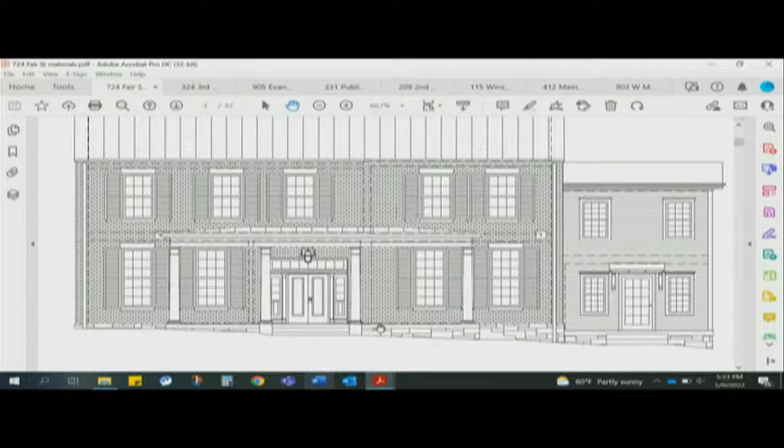As for the roofing, it was my understanding, and the applicant just corrected me, that they are asking to use wood shingle on this portion of the building. The guidelines state that roof materials contribute to building style and character, and recommend that one retain their historic roof materials and shape. If partial or wholesale replacement is needed, that should be done in a composition that matches the historic materials.

Since there are no historic photographs that show wood shingle that I have found, I did research the fire insurance maps to gather any relevant information on the historic roofing material. The 1913 Sanborn maps seem to indicate that slate or tin was in place on the main portion of the building.

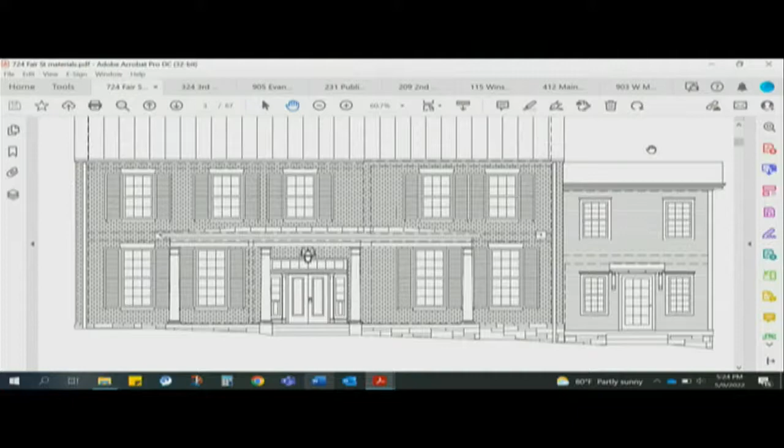I did that research thinking the applicant wanted to replace roofing on the entirety of the building, so that was my mistake. Though it does appear that the Sanborn maps from the 40s and 50s show there was a composition roof at some portions, including this one. Now, when they say composition, that could be a number of things—it's shake or shingle. It did not indicate whether or not it was asphalt or another material.

The use of asphalt was pretty common from the 19-teens forward, so it's not clear to staff if this was wood shake or not at this portion of the building. It is of a colonial revival style influence, and in our community, at least at this point in time, most of those roofs are of asphalt shingle composition.

So with that, it is recommended that the commission provide three motions. One, a recommendation request to provide a favorable recommendation for the Board of Zoning Appeals. For the roofing alteration, it be denied unless there's more information provided to indicate that would have been a wood shake roof at the time of construction. And for the alterations to the entrance, it be recommended that the commission approve with conditions.

The applicant is proposing construction of an accessory structure at the rear of the property. The guidelines recommend accessory structures be built in traditional locations, such as behind the principal structure, designed to be visually subordinate in scale, size, mass, and intricacy, shorter in height, and consistent with the elements and context of the principal structure they serve. The details should be complementary but not visually compete with the character of the principal structure.

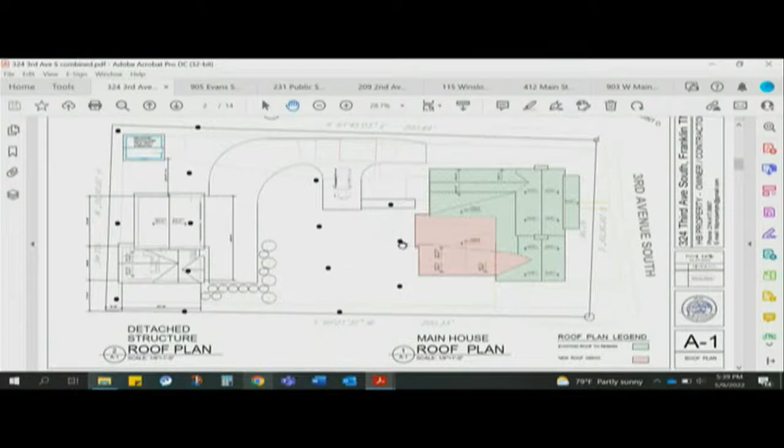In this case, going back to the site plan, the accessory structure is proposed at the rear of the property, about 6 feet off the property line, consistent with the guidelines. It's situated so the entire structure is behind the principal building. The design is compatible in detailing and scale to the principal structure, meeting the guidelines. The scale is one story, which is appropriate, matching the one-story principal building, and the materials will match it - the applicant proposes wood siding and similar roofing material.

The siding used on the accessory structure will need to match the reveal on the principal building. As for size, it is visually subordinate. The accessory structure is 18 feet at the peak of its ridge, and the principal is 18 feet 6 inches. It's harder to be significantly shorter when you have an accessory structure or a principal structure that's only one story, so they did work to get it just a little bit shorter.

The approved square footage of the principal building is right over 3,500 square feet. The footprint of the proposed accessory structure is 1,300 square feet, so it is downsized from what you saw previously, and it is in compliance with the zoning ordinance, which does not permit an accessory structure to be more than 50% of the footprint of the principal building.

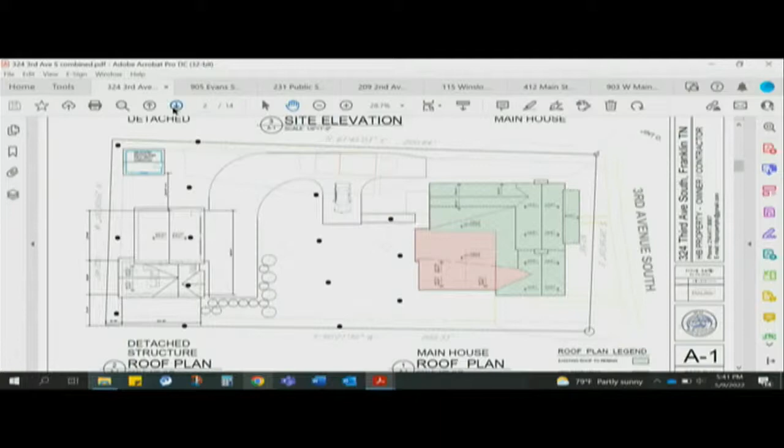The DRC at the last meeting had made comments about the massing of the garage portion in relation to the living quarters that are designed to be a part of the building, so the applicant has altered this. I'm going to go to the 2D elevations. You can see here the garage portion is a little taller than the living quarters, which are designed to feel as if they were an addition to the garage.

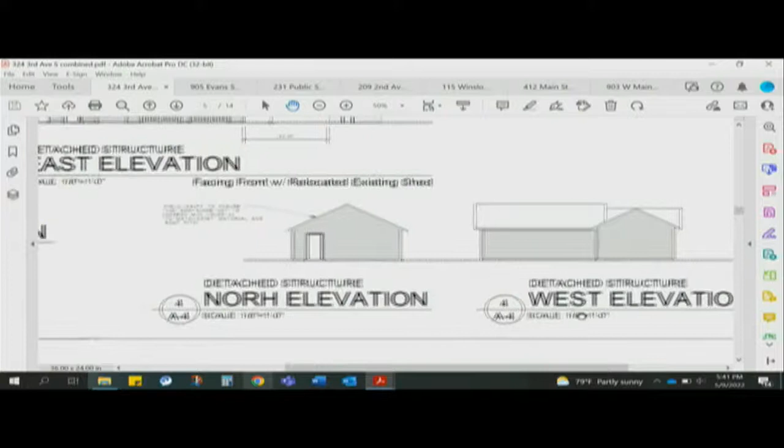This is the elevation that would face the back of the house. This is the elevation that would face toward the railroad. This is the elevation that faces toward the right and the rear, which has no fenestration. That's not typical, but because this is a rear elevation that backs toward a neighboring property, there was a request by the neighbor that no windows be placed on the portion that faces toward their property. So this is consistent with the guidelines, and that massing has been broken, so you can see that roofline break here.

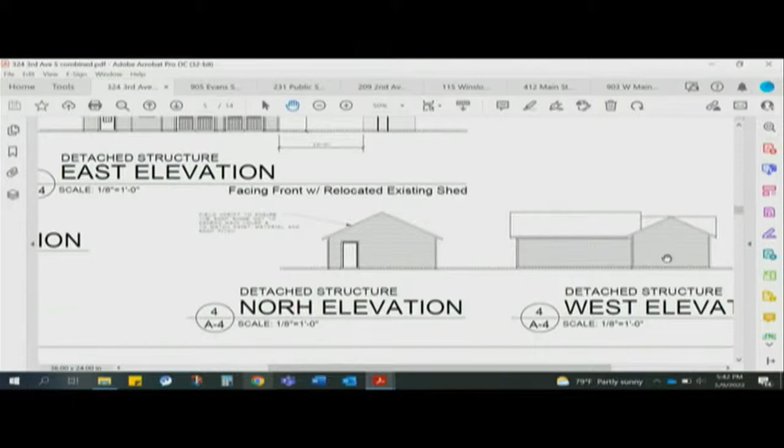With that, it is recommended that the Commission approve the construction with the conditions that the applicant submit an accurate site plan with all current specifications and scope of work as approved. The reason we say that is there are a couple of notes left over from the previous application that aren't exactly correct anymore. Staff has contacted the applicant, and we want an exact correct version before that goes forward to building permit.

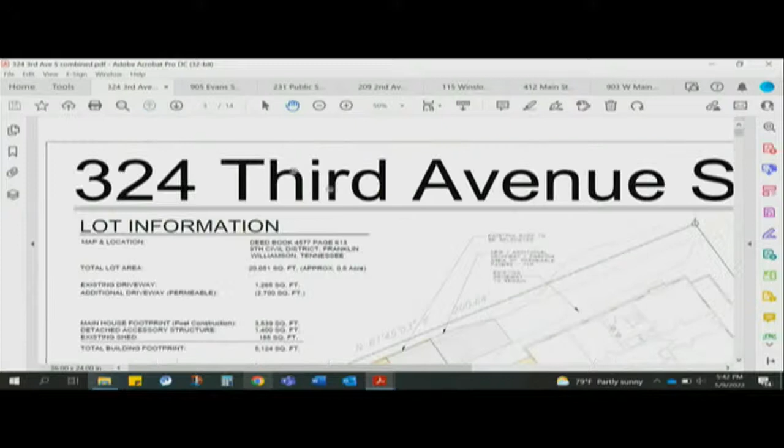The construction of the approved accessory structure would be contingent upon the construction of the addition. The addition was approved by the Historic Zoning Commission but has yet to receive a building permit. It has to be permitted and constructed in order for the accessory building to meet all the requirements of the zoning ordinance as it relates to the size of the building it serves.

The siding must also match the reveal of the principal building. The windows and garage door specifications must be submitted to staff for review and approval prior to issuance of a building permit, and the foundation material must be consistent with that of the principal building and submitted to staff for review and approval as well.

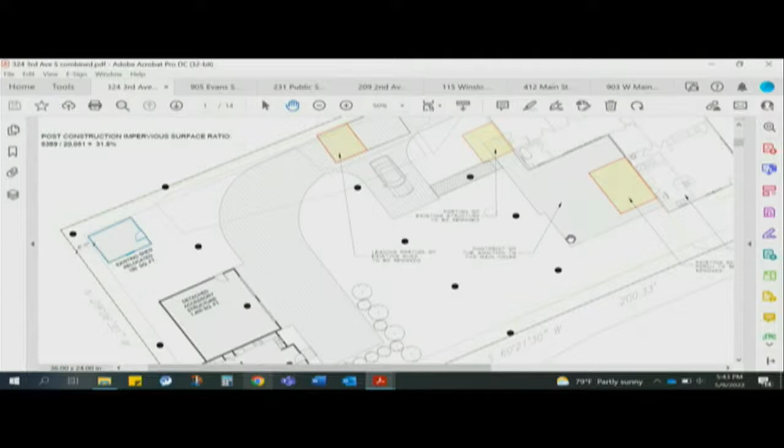Thank you. All right, would the applicant please come forward?

Welcome. Hello again. How are y'all? Fine, thanks.

Good. Any additional comments on the application? She did a great job. We tried to just adjust after our couple of meetings last month. Okay, but I appreciate everything she said.

Are there any citizens who wish to comment on the application? We've got one speaker card: Chuck Rose?

Good evening, Mr. Chairman, Commissioners, thank you for the opportunity to speak. My name is Chuck Rose. My wife and I reside at 335 4th Avenue South, the property directly behind the applicant. First and foremost, you've done some great work adjusting this since the first time I saw it and had a panic attack, so thank you for that. One of the items I was going to speak about looks like it's already been covered, so I ask you to consider three items in addition to the applicant's request.

I believe this because when I purchased our property at 335, we were given a plat of the property, and the current existing fence in the back of the lot is in the wrong spot. So if you're saying 6 feet from the back of the fence, I think it needs to be 11 — I think your property's got 5 feet of ours, if that makes sense. I ask you to consider this before you build anything. So I think it's 5 feet off, is the short story.

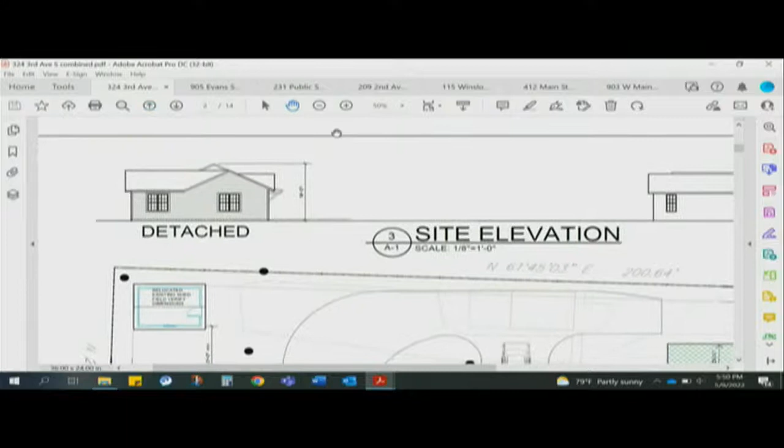And then the front door entry is taller in one elevation than the other. Here's the site plan, it might help.

Yeah, I don't think the line appears there either. I think that the line between those two roofs, they're in the same plane in elevation. On the side elevation, you can see they touch. They're coplanar.

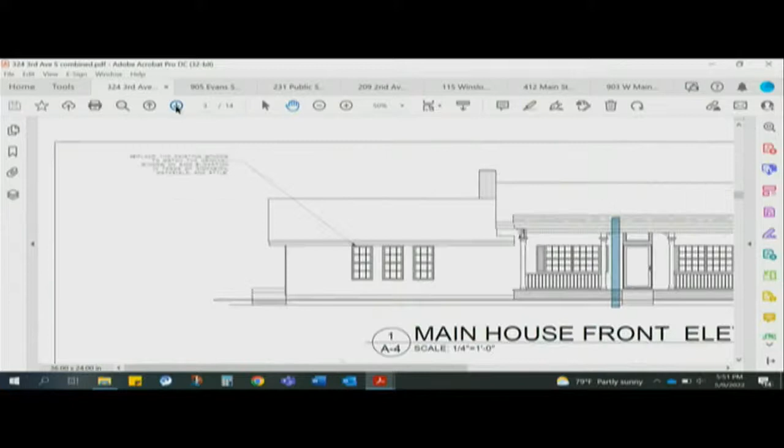I don't know that I care if the line's there or not. In real life, it's not gonna be there, because they line up. But the front entry is shown one height on this front elevation and a different height on the side elevation.

So what we can do is request some alterations to the approved plan set, because this plan set altered some things for the accessory structure only and kept some numbers from the previous proposal, so they weren't jiving. For example, this set says the accessory structure is proposed at 1,400 square feet, but in actuality it's 1,300 square feet because the plan has been adjusted to meet some of the previous comments, but the calculations portion of the document was not adjusted.

So we are asking for some changes. We can ask the architect for the applicant to ensure that these elevations are correct and work with staff on that before they would be eligible for a building permit, if that's something comfortable with everyone.

Anything else? Then we've got a motion to approve as presented with staff recommendations. Any other comments? The staff recommendations and comments, what she just read into the minutes, what she just stated, will be in the minutes.

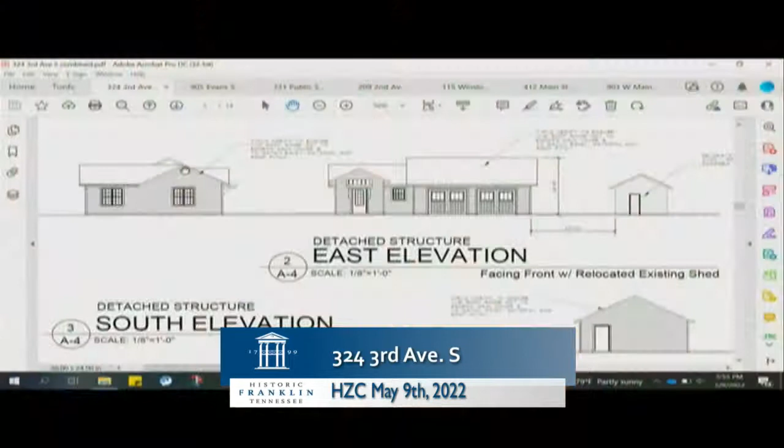So I think your intent is this one, but you can look at the lines here. The way this is drawn, it appears that this would be centered and all on the same plane, but it's not. Over here, you've got this butting forward. But you see here, the garage is supposed to be forward of the living space, correct?

I thought the living space was supposed to be, based on recommendations from the last meeting, forward from the garage. If you look at the site plan here, they're lined up. Okay, so I think that's the confusion. Gotcha.

And see that in elevation, that little notch between the living space and the garage, right there, that doesn't exist in the side elevation. The roof is 2 feet forward or whatever that reveal is. But the front line of the dormer is showing to be pretty flush with the front of the garage, and it's notched in. So if you're looking from the side, would that really show? Yeah, there's a deeper overhang over the notch, which means it aligns. Okay. I think your architect can figure it out.

Okay, anything else? We've got a motion to defer. Amanda, can you tell us what date the next historic zoning meeting is for, please? Certainly, the deferral needs a date certain, and the next voting meeting would be on June the 13th. Thank you. And Ms. Rose, the applicant is welcome to return to design review if they so choose. Yes, I would need to know that today, though. Okay, all in favor of the motion to defer, please say aye. Aye. Any opposed? Okay, we'll get there.

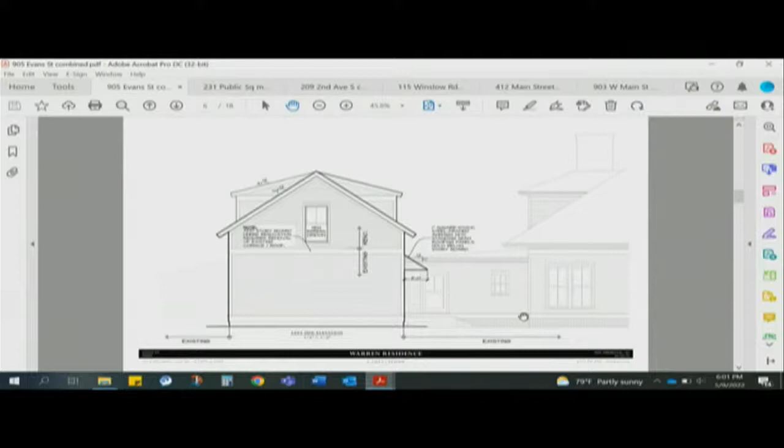The applicant is proposing to add 2 standing seam metal awnings to the front. That is based on the DRC comments, where it was previously proposed to be 1 continuous awning, and the DRC recommended it be divided into 2 to be more in keeping with the guidelines. The standing seam is different from what's on the rest of the building, but it's a rather common awning material.

So it is recommended the commission approve the proposed alterations with the conditions that the siding on the altered garage must match the existing material and reveal, that the awnings must consist of standing seam metal, that the window profiles and dimensions meet the guidelines and be submitted to staff for consideration prior to issuance of a building permit, and that it meet all requirements of the BNS department prior to issuance of a building permit.

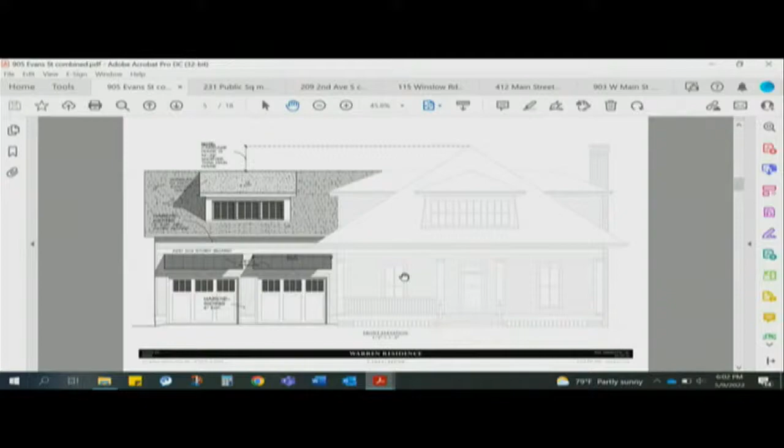I did want to say, I don't recall who suggested the change, that the original dormer seemed a bit heavy. And then when the architect redrew it to the single standing metal seam, I like it so much better. So I very much appreciate that. Good, I'll always take credit. Okay, I'm sure it was you, I'm sure.

Any other comments about the application? No, sir. Okay. Are there any citizens who wish to comment on the application?

All right, Commissioners, we need a motion. I'll move to approve with conditions the issuance of the certificate of appropriateness for alterations to the roof line, dormer construction, and awning placement. Is there a second? Second. Thank you, Tyler. All right, discussion.

Any comments? Other than this fits right along with the others on the street. Yes, sir, it does. Thank you so much. Any comments? All right.

All in favor of the motion, please say aye. Aye. Any opposed? You're done. Thank you so much. Thank you.

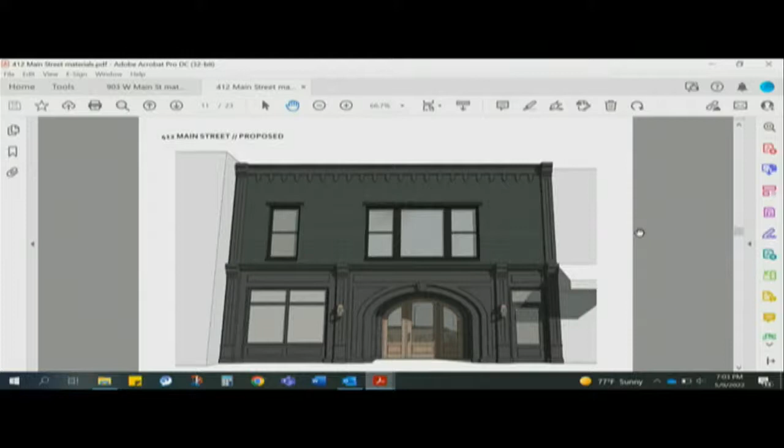This design does not model a traditional storefront arrangement as outlined by the guidelines, nor accurately convey the previous architectural elements of the building. The proposal employs an arch shape and size not typical to the downtown historic district, as the existing arches consist of elements like the large arch that gets up into the second floor, which used to be a livery, as was the subject building.

Smaller historic arch features are seen on the pedestrian doors of the white building, and upper facade window shapes appear throughout, like here and here. These are historic elements—they're not replications or alterations or modifications of historic elements.

The guidelines demonstrate storefronts with regularly spaced rectangular openings as traditional storefront features. Since many of the storefronts in downtown Franklin have been altered, the types of storefronts recommended by the guidelines are of a typical historic design that do not overshadow the remaining historic storefronts in proportion or detailing.

Restoration is a type of treatment that can be supported—that is the act or process of accurately depicting the form, features, and character of a building as it appeared at a particular period of time. The applicant has done an extensive amount of research to show how the building looked at a particular period in time. However, the application shows elements from different portions of the building throughout time.

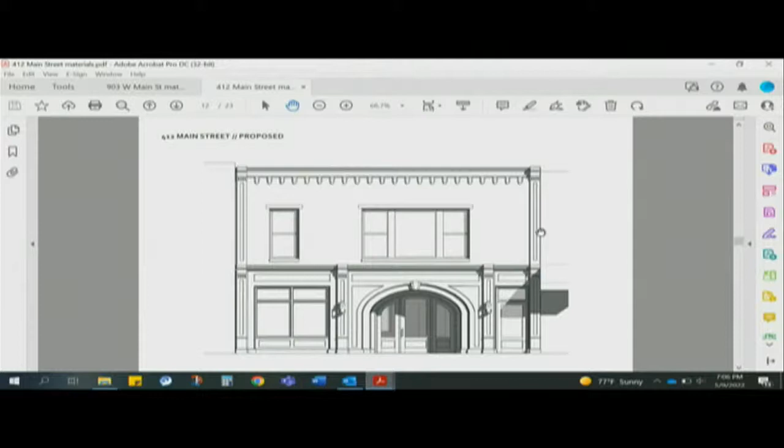There is also a portion of the proposal where the applicant is seeking to paint the upper facade to create the appearance of a distinct facade on this two-storefront building. As mentioned, it's one building, two storefronts—they'd like to paint the left side. The guidelines recommend against painting masonry walls that have not previously been painted, unless the walls have been extensively patched or repointed resulting in a patchwork of masonry surfaces, which does not appear to be the case here.

So it is recommended the commission deny the storefront and facade alteration proposal because it's not in keeping with the recommendations of the guidelines or the SOI standards, and if issued a COA, that the application meet all the requirements of the Building and Neighborhood Services Department prior to issuance of a building permit.

Thank you. Would the applicant please come forward?

Glad you guys got a snack so your blood sugar's up. Feeling good? Chocolate. Oh, good.

Nice, well thank you again for considering this and listening to us. I won't go through the full backstory again, but I do realize we don't fall neatly in the boxes that Amanda listed, so that's why we come to you guys for your guidance and expertise. I think what we're trying to do is create a facade that honors the history of the building as well as the historic fabric of downtown Franklin.

We're pulling from most of the livery elements from back in the 1890s, while also trying to be a good neighbor. We don't have anything left from the original building. There really is nothing of the facade from the original structure that remains. Some of the window placements are still there—the one small window on the left side is kind of in its original location, but it's been altered as well. It was the whole building with Waltons, so this is kind of where we're left.

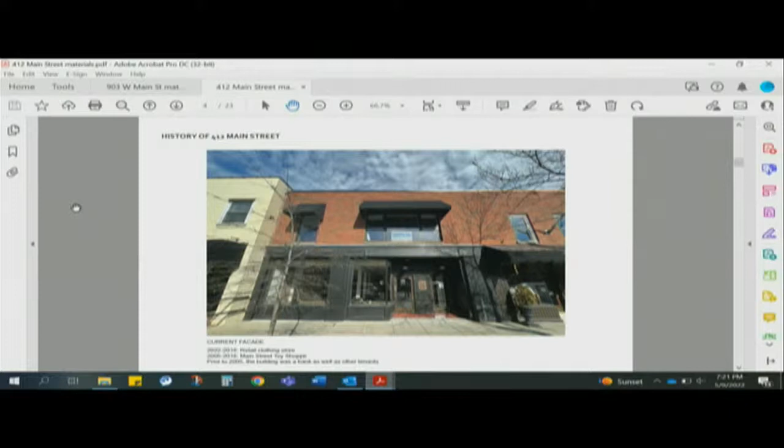Above those windows, above those entry doors, it's all solid at the transom. So we've even tried - that image, I see a lot more glass in that than even your rendering. I think there's a lot more plate glass in that rendering, but as far as fenestration goes, I think they're probably pretty comparable.

I've not seen anything, or maybe I've missed it, but I don't think we've been provided any information showing that at least akin to the current configuration wasn't where we were in the early 1970s or late 1960s. I'm just saying, if we're going to step away from where we are right now, for better or worse, I feel like we need something showing that it's not consistent with that 50-year mark, that it's not where it was. Whether I like 1940s or 1890s better than 1972, I'm cognizant of that 50-year mark in the guidelines.